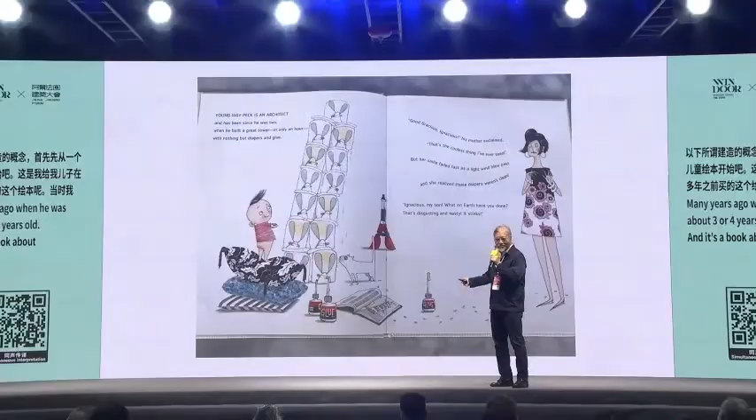I'll start with a children's book. It's a book that I bought for my son many years ago when he was about 3 or 4 years old. And it's a book about Iggy the architect. He was a little baby boy who was really into building things with anything that he could get his hands on. Outside, in the mud, inside, with food.

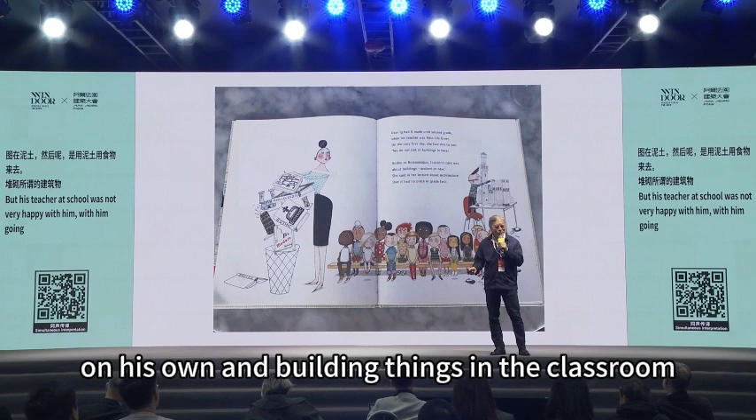But his teacher at school was not very happy with him going off on his own and building things in the classroom, because she had a little bit of a traumatic history when she was up in a high-rise building and she got stuck in an elevator. And this trauma had led her to have this anxiety against architecture, much to the displeasure of this boy named Iggy. He was unhappy about this.

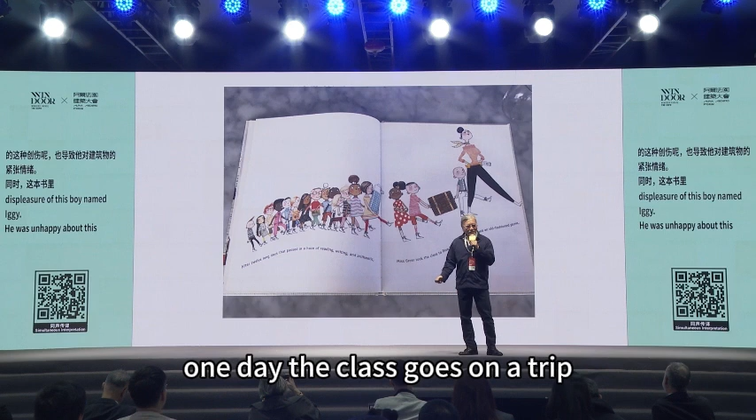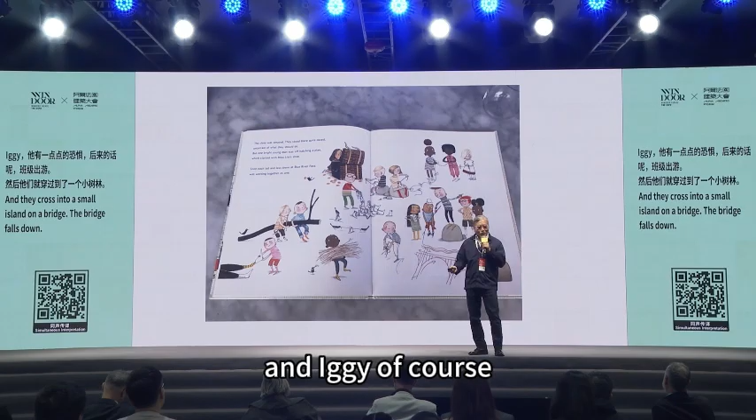One day the class goes on a trip, and they cross onto a small island on a bridge. The bridge falls down. And Iggy, of course, comes to life, strikes up a plan and builds this bridge. And the teacher finds again

the value of architecture. And this story really, by the way, my son is studying architecture at Hong Kong University right now. I had nothing to do with it.

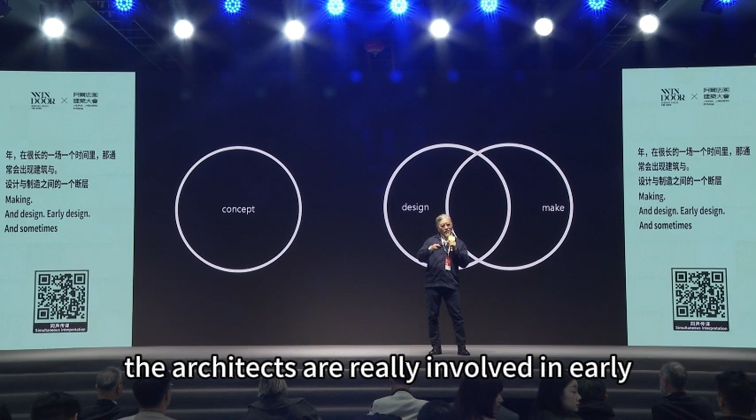Over the years in America especially, there has been for a long time this kind of segregation between construction, making, and early design. Sometimes the architects are really involved in early design, conceiving ideas, and then the construction happens later on with a different group of people. In an ideal scenario, these things become more intertwined, very much in the way that product industries operate, where things are much more vertically oriented, and the whole thing is governed by a single entity.

So this is an idea that really came about because I noticed early in my career that the designing part perhaps was easy, but construction was very difficult. This is where all the challenges come. And so I had developed a lot of respect for people in the industry of doing construction and making. And a little bit less for ourselves, where we thought we need to have a little bit more of a hand in making things clearer to the people that are making and building.

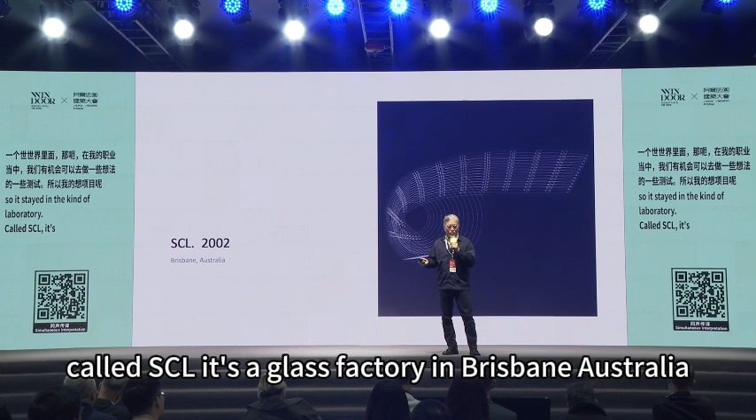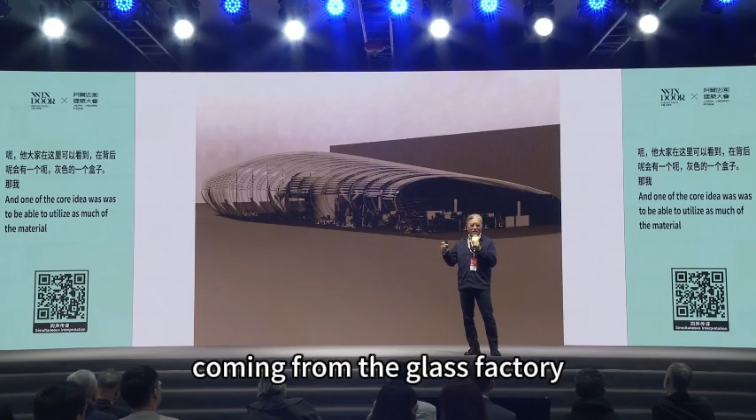Early on in my career, with this idea in my mind, we had an opportunity to test it out. It's a project that never got built, so it stayed in the kind of laboratory called SCL. It's a glass factory in Brisbane, Australia. It's a simple building. They wanted an office in front of their factory, which is the gray box in the back. And one of the core ideas was to utilize as much of the material coming from the glass factory as possible to build this office in front of it.

At the time, we were searching for the right tools to be able to do this. And the idea was: can design information be utilized for manufacturing?

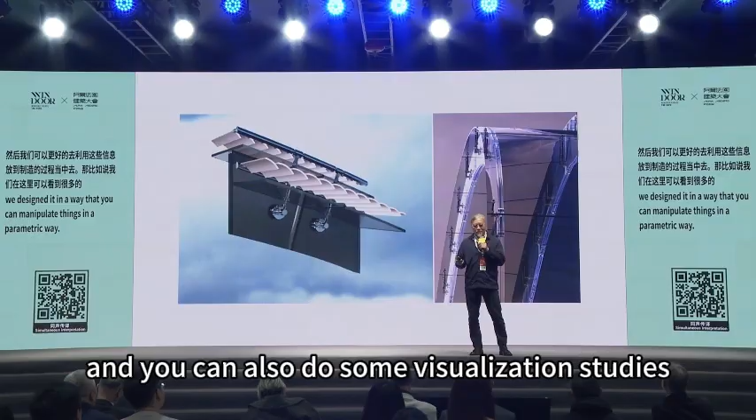So it's a series of glass ribs, and we designed it in a way that you can manipulate things in a parametric way. And you can also do some visualization studies and also integrate engineering. But ultimately, we wanted to find a way to deliver a simple, dumb drawing that the factories could utilize for

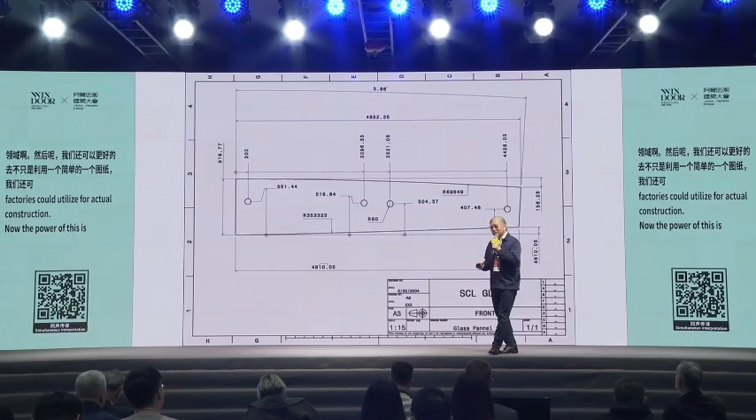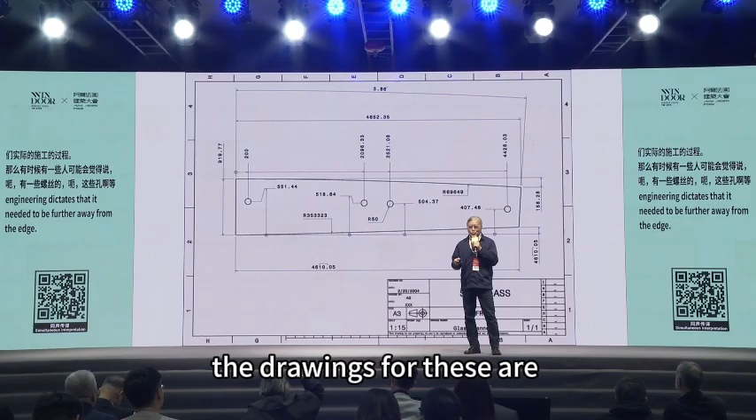actual construction. Now, the power of this is that from the designer standpoint, let's say one of those bolt holes needed to move because the engineering dictates that it needed to be further away from the edge. The drawings for these are thousands and thousands of sheets, and the corrections would take a long time. But if you did it correctly in the model, these things could be done in a matter of minutes and not days.

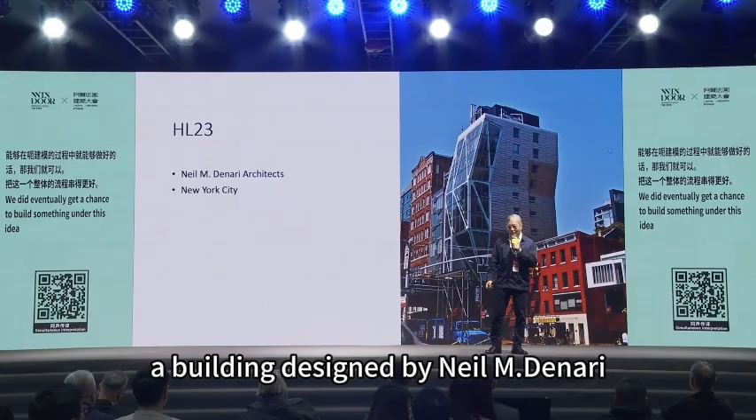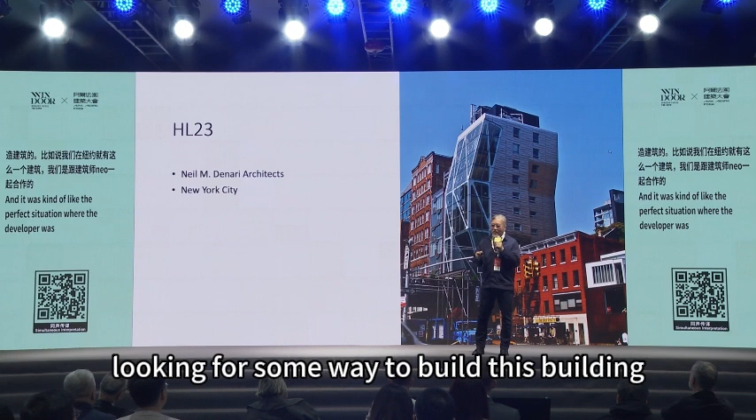We did eventually get a chance to build something under this idea, a building designed by Neil M. Denari, an LA architect, for a project in New York. And it was kind of the perfect situation where the developer was looking for some way to build this building in a different way. And I'm only talking about the facade, not the interior parts. It's a relatively small building, 13 stories tall, and clad with glass and stainless steel.

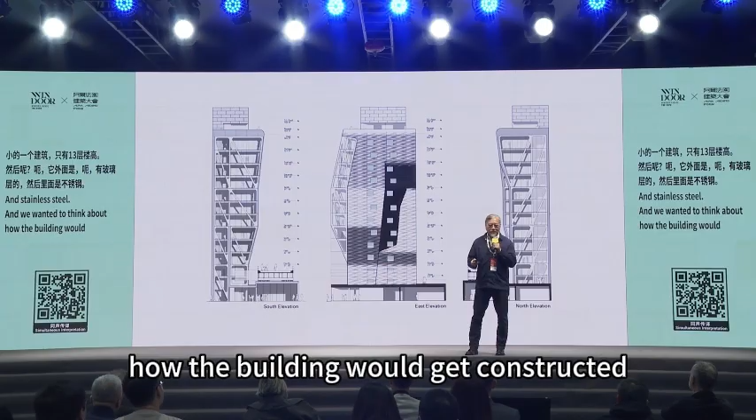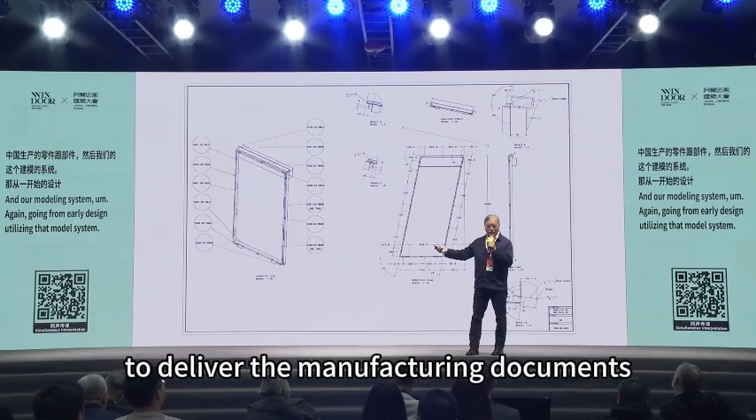And we wanted to think about how the building would get constructed first before we got into the details. Here are some parts and pieces that came from different parts of the world, including China. All of the glazing was manufactured there. And our modeling system, again, going from early design, utilizing that modeling system to deliver the manufacturing documents. And this was the very first panel that was made in a factory in Shenzhen and assembled.

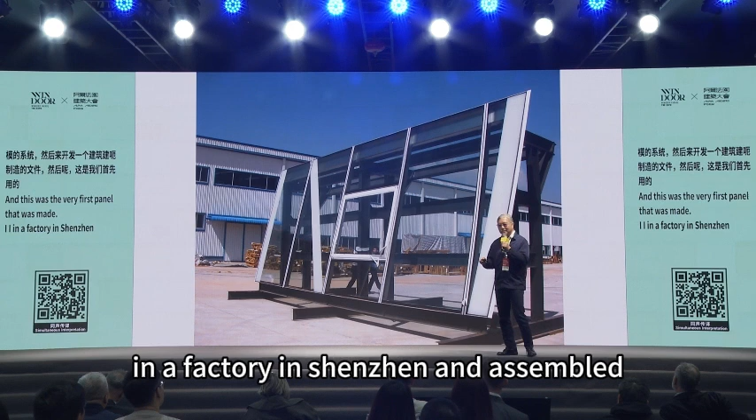And one of the other things that we were really trying to achieve was to get the level of quality as high as possible in construction, and level of accuracy and precision, which we found to be very doable at that time. It was around 2006. The glass manufacturing was already very advanced by that time, but some of the manufacturers based in the United States would reject this project because it just didn't make any economic sense.

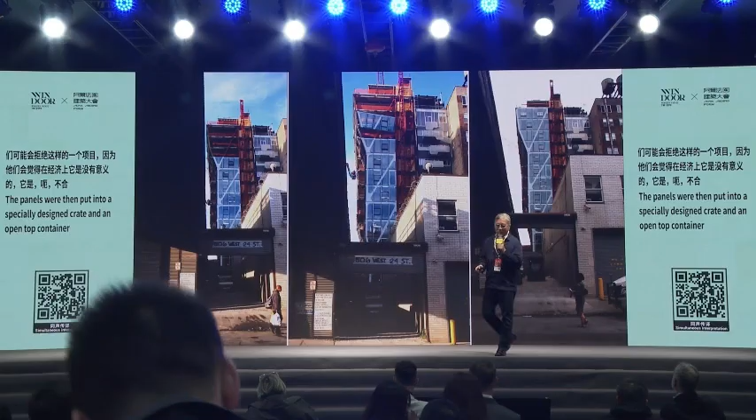The panels were then put into a specially designed crate and an open-top container and built in about a week. All of the facades went up very, very quickly because they were all made in these huge panels, and there was a very limited amount of site work involved.

And in the end, these are some of the panel images of the stainless steel. We had to go down to Argentina to find a company that would make these panels for us. They were making auto body parts. These are dies utilized for making fenders for cars. And it was actually the perfect shop to get these panels made.

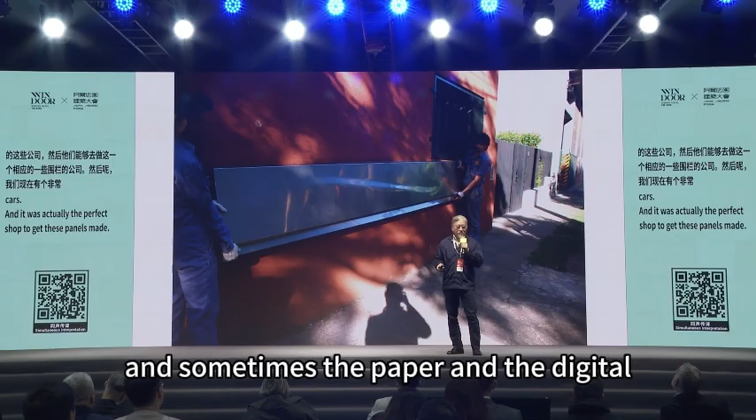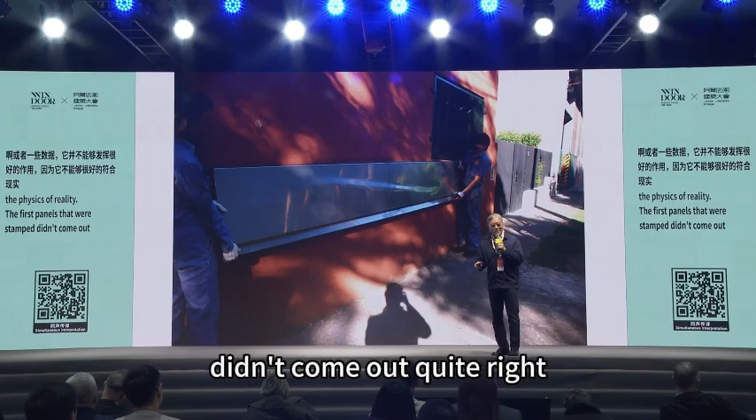And sometimes the paper and the digital doesn't really work because it doesn't suit the physics of reality. The first panels that were stamped didn't come out quite right because we had not accounted for the spring-back nature of stainless steel. The dies were modified and also tried on mild steel. This looks like stainless steel, but this is mild steel. And it gives you this very lovely form.

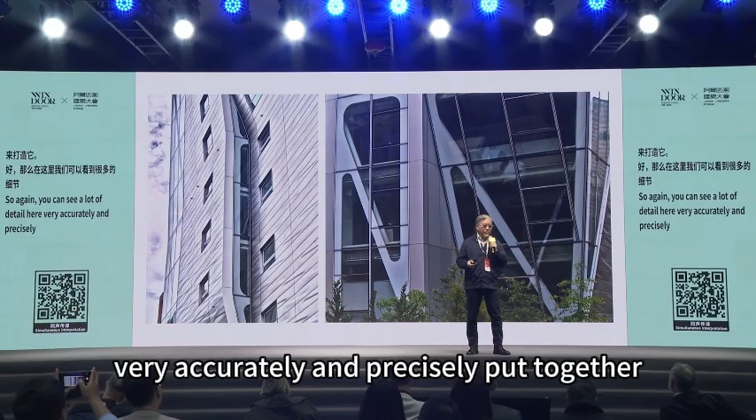In the end, those panels are also pre-insulated, weatherproofed, panelized. In New York City, the construction costs are very, very high. So this was also another way to do this in an economical way. So again, you can see a lot of detail here, very accurately and precisely put together for a project.

And then after that, we had another opportunity to look at our process as a way to do an odd project for Kukje Gallery in Seoul with the architect SO-IL, who are dear friends of mine. The project is a small gallery, and it has this kind of wrapper made out of stainless steel rings. It has a simple concrete box, and it has these appendages, the elevator shaft, the air conditioner, and the stairwell. And then the whole thing is sort of shrink-wrapped with chainmail.

Now, this is a material that we had never worked with before, so we needed to understand its behavior. You hang it one way, and it kind of droops down like this, and then you hang it 90 degrees in rotation, and you get a much nicer, happier chainmail fall. And we knew that that's the way to hang it onto the building.

We also had to understand the kind of geometrical nature and behavior of the material, and we noted the similar behavior between net and this chainmail. The first mock-up, I busted a lot of fingernails trying to make this out of key rings, and then to try to, again, understand its behavior.

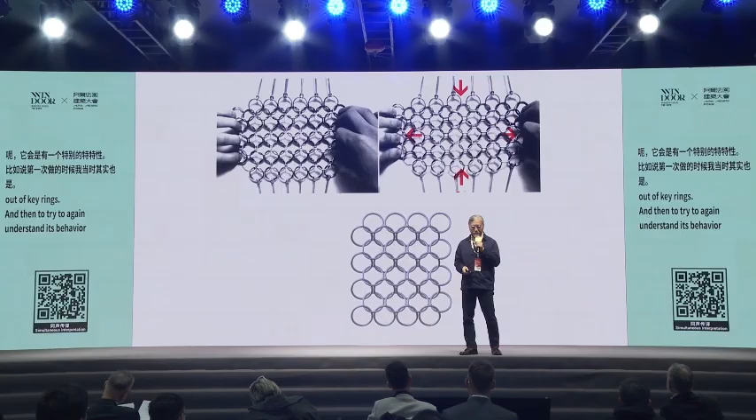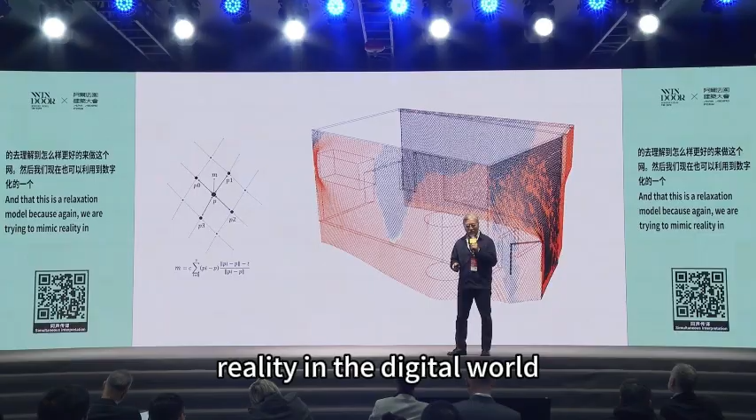And then it all gets digitized. And this is a relaxation model, because again, we are trying to mimic reality in the digital world. And what happens here is that once it gets mimicked with its controlling points and its behavior, then it can be analyzed and set to see what the state of this material is and what shape it forms when the chainmail is hanging on the building in its natural state.

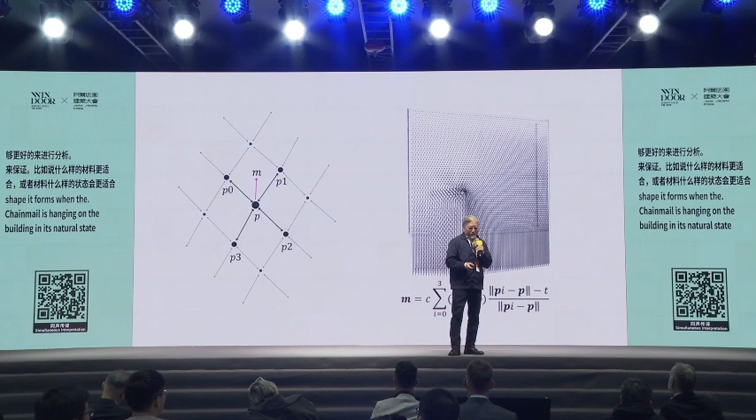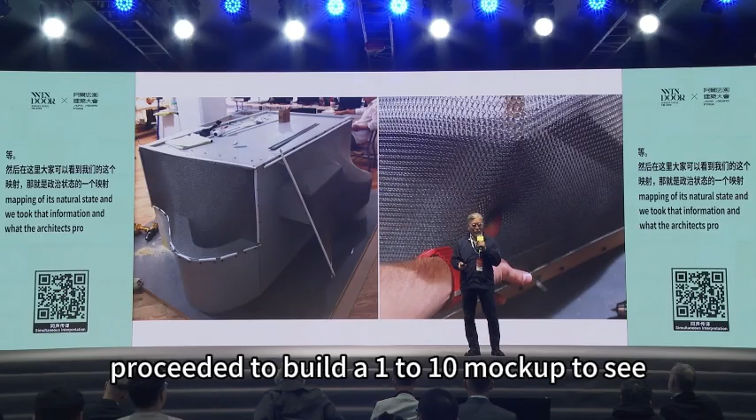And then this is the mapping of its natural state. And we took that information and with the architects proceeded to build a 1 to 10 mock-up to see if the model was true. And in fact, it worked out in a way that we proceeded to make the first chainmail mock-up itself.

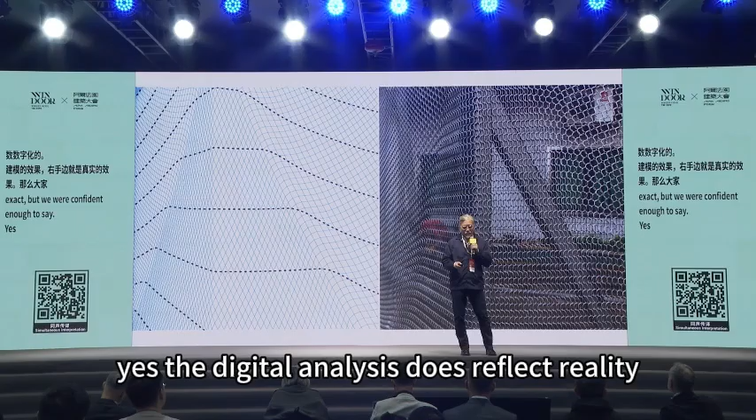Those are not rips, these are just the seams which would be welded together with the rings. And then you have the digital on the left and the reality on the right. And it's not one-to-one exact, but we were confident enough to say, yes, the digital analysis does reflect reality.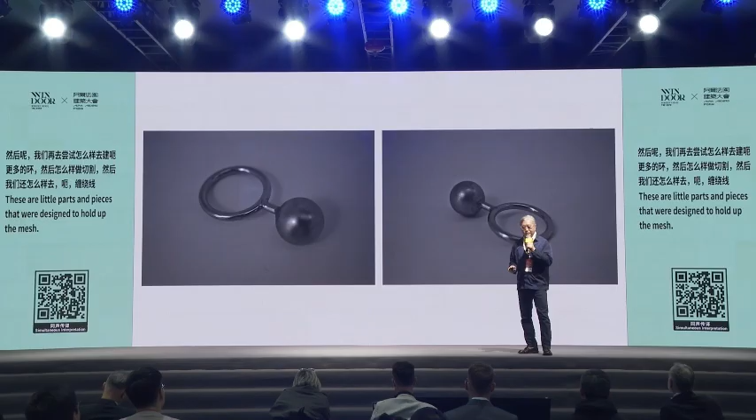This is the first ring tested for load, and then trying to figure out how the rings would be made, which would be a series of coiled wire that would be cut. These are little parts and pieces that were designed to hold up the mesh. And then these are the terminations of the parts where they go into a channel to support the ring.

And here you can see the first mock-up of the contraption at the top of the building where the mesh is hanging from, and on site. Now you can see that it's a little bit more complicated than it may need to be, but what we have here is that we wanted to prevent any concentration of load at the top edge where you would have the most amount of dead load and most amount of wind load.

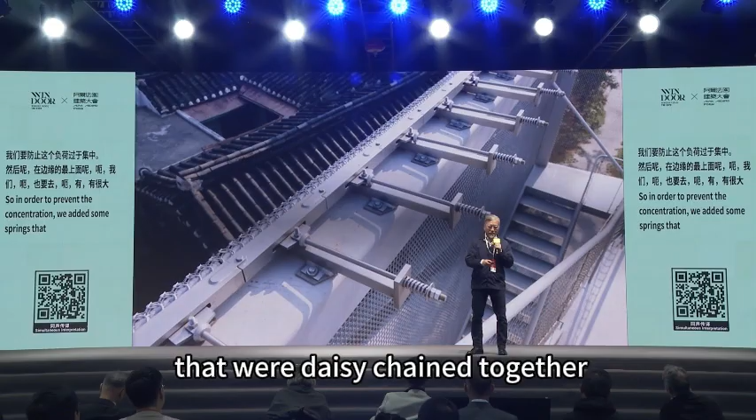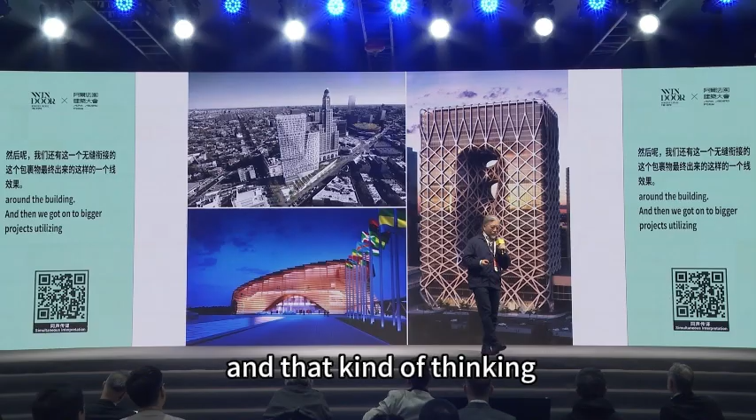So in order to prevent the concentration, we added some springs that were daisy chained together at the face. So if you had any concentration, those would dissipate and be shared by the other connections. So then what you end up with is this kind of seamless wrapper around the building. And then we got onto bigger projects utilizing that methodology and that kind of thinking, in various different locations around the world.

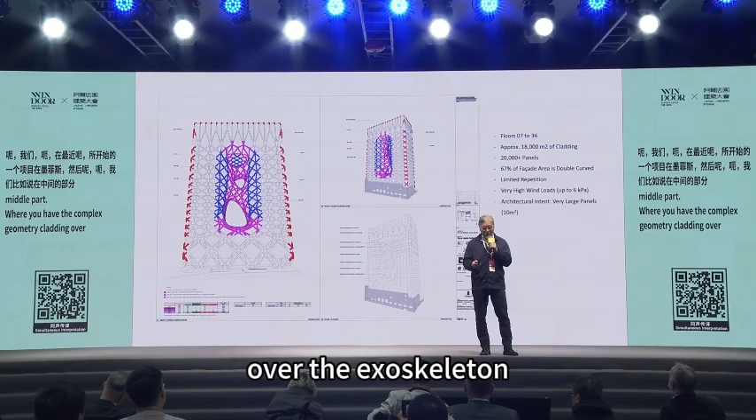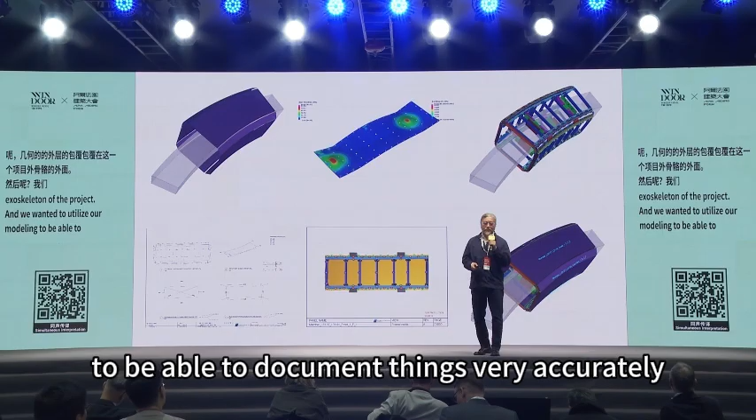Morpheus is a project where we came on quite late, and the problem area was this middle part where you have the complex geometry cladding over the exoskeleton of the project. And we wanted to utilize our modeling to be able to document things very accurately, but in a very workable way in the field. We had to gather some information.

We wanted to make sure that we have the architectural model, and then the structural model, which is on the right, and then the orientation model, which is shown in the blue here. And that gave us the ability to understand what we needed to do between the structure and the cladding. As you can see, there's a lot of variation and empty space on the outer zones between the cladding and the structure.

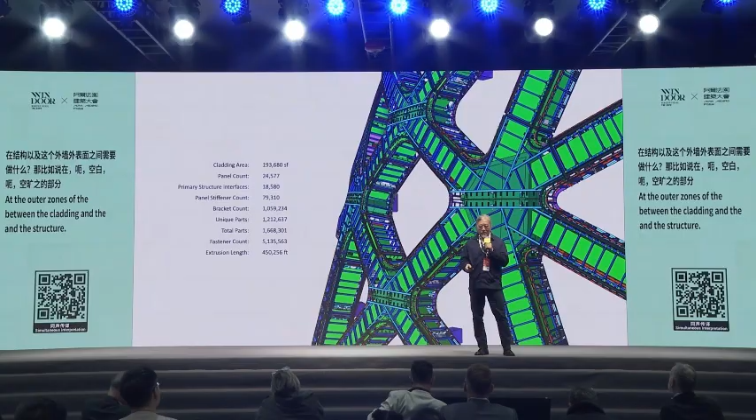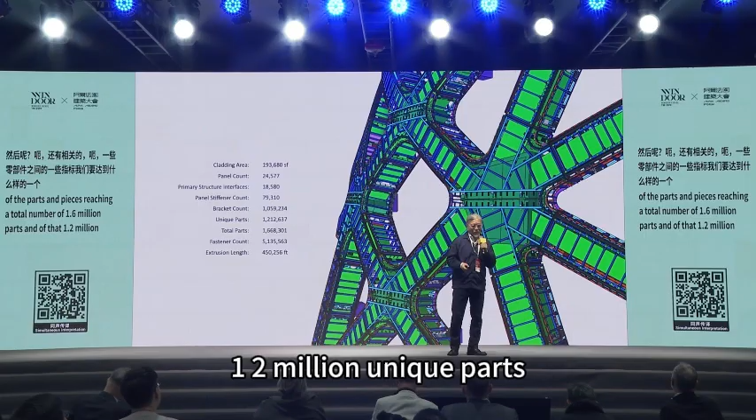And some metrics about all of the parts and pieces, reaching a total number of 1.6 million parts, and of that, 1.2 million unique parts. So in some ways, there's no other way to do this rationally without going through a full, deep modeling process that was automated.

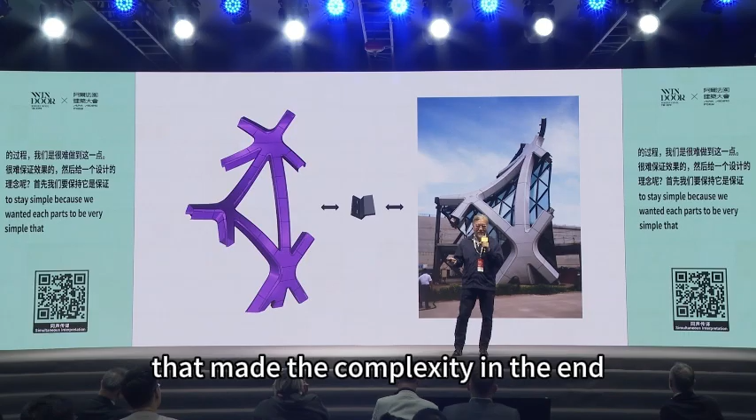But the design concept had to stay simple because we wanted each part to be very simple, that made the complexity in the end. So here you can see all those simple parts and pieces that were designed for this project. Any factory could make this. And then the assembled pieces, so that the factory could look at all of these parts and pieces that were assembled to visually check that they were in the right places.

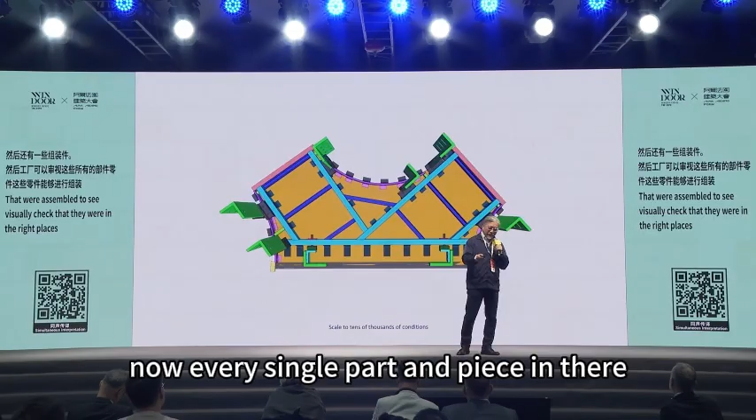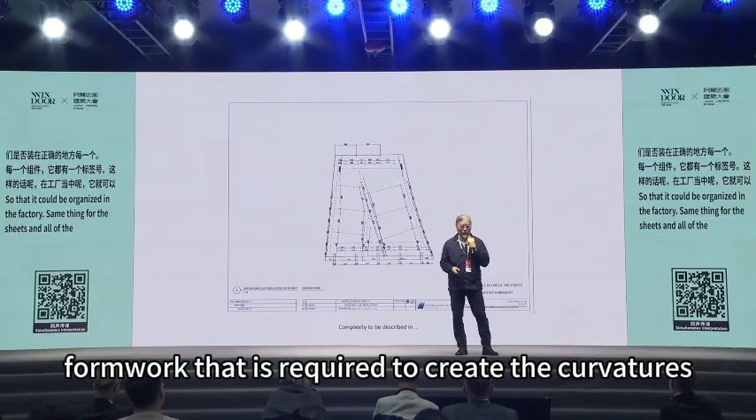Now, every single part and piece in there is tagged with a unique tag number so that it could be organized in the factory. Same thing for the sheets and all of the formwork that is required to create the curvatures.

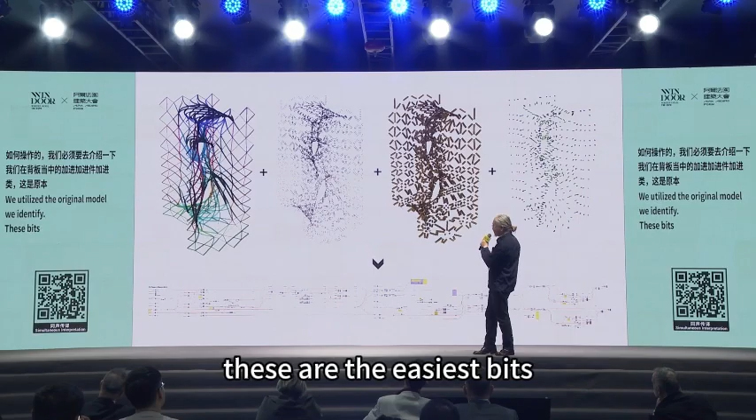I'll skip through this. This gets into a little bit too much detail, but it just basically shows, for example, how the process actually works. So we need to introduce some stiffeners, for example, in the back of the panel. We utilize the original model. We identify these bits first. These are the easiest bits, which are more or less kind of simply curved or straight.

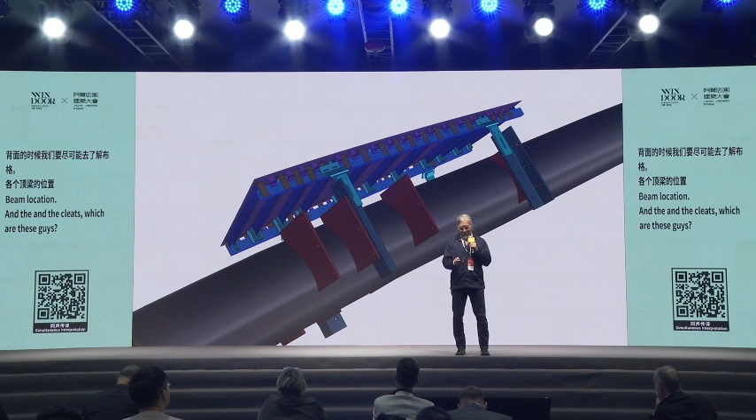And then we identify where the brackets would be to hold up all of this and create the surfaces where the stiffeners would go. And once we try it out on a single panel and we know that it's going to work, its relationship to all of the beam locations and the cleats, which are these guys, would then be all coordinated. And the magic here is really that all of that then gets automatically generated, and it's not somebody sitting there trying to model up all these pieces individually.

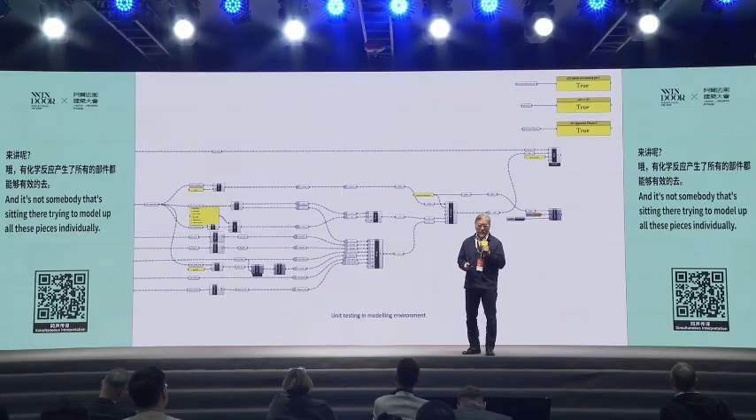We also need to do a check to see if it's correct. So all these self-addressed parts and pieces, we break it apart into individual parts and pieces and then bring them all back together to see that they do fall into the right location.

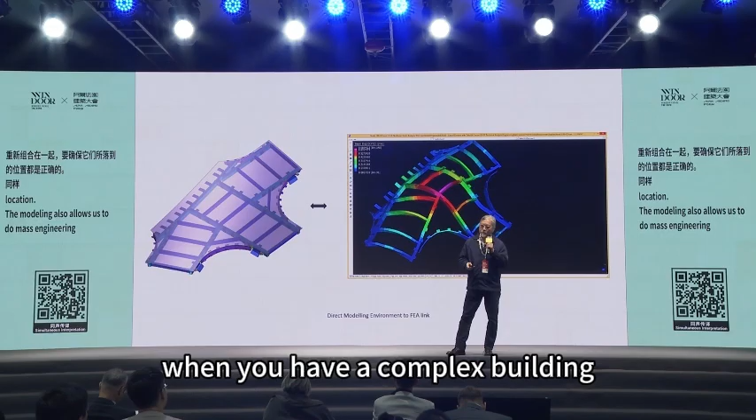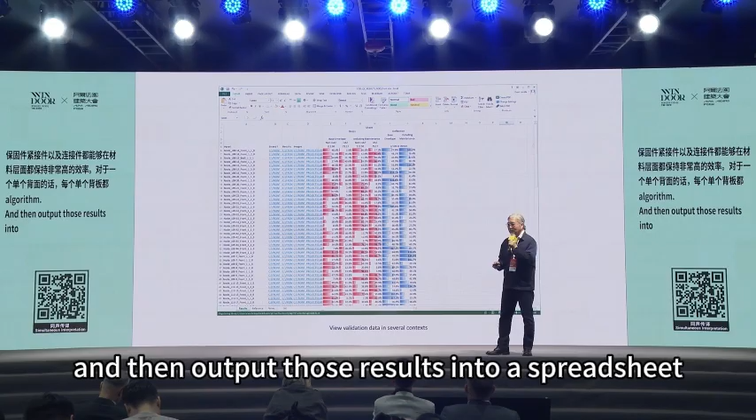The modeling also allows us to do mass engineering. When you have a complex building, often you might choose 1, 2, or 3 locations, which are the worst case, and design everything based on the worst case engineering. But in this case, we want to check everything and then create some sort of families of brackets that are going to give us a little bit more efficiency in the material use. So every single panel, every single condition then gets modeled through an algorithm and then outputs those results into a spreadsheet. And again, all of this is done in an automated manner.

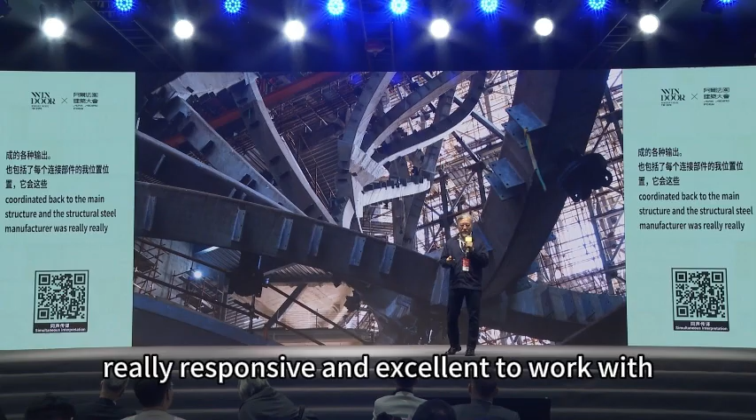Output including the locations of each cleat, which is coordinated back to the main structure. And the structural steel manufacturer was really, really responsive and excellent to work with in receiving our digital information to be put onto their steel. And as you can see, they were located in a very precise and accurate way.

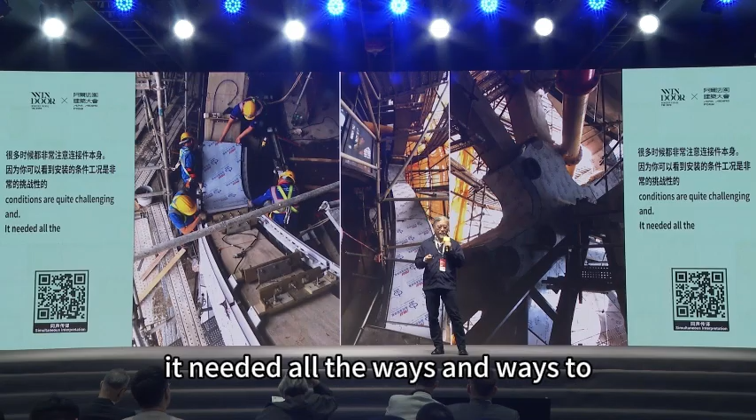A lot of attention was paid to the brackets because, as you can see, the installation conditions are quite challenging. And it needed all the ways to install the panel in an accurate way, because if the brackets didn't allow you that flexibility, then the joints would be off.

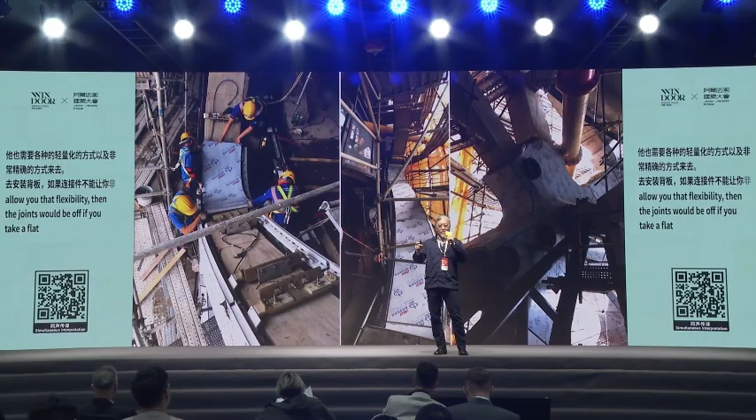Now, if you take a flat panel and you try to align the panels, it's relatively easy, in and out, up and down, and you should be okay. But on a double curve panel, that adjustability is really, really key to getting the joints to line up. And as you can see, there's a tolerance of about 1 to 2 millimeters in the worst case scenario to create an alignment between the panels.

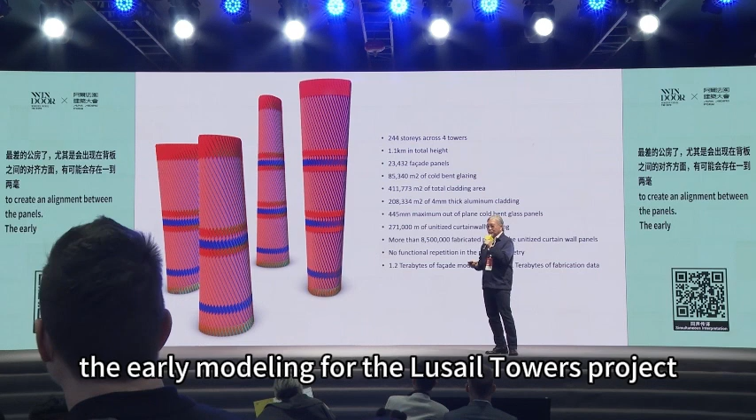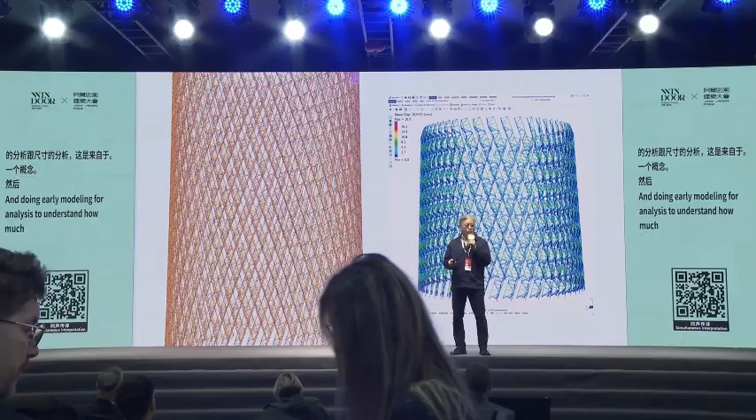The early modeling for the Lusail Towers project was very helpful in defining and knowing what the project is in terms of its size, scale, and quantities. And this is taking from the concept and doing early modeling for analysis to understand how much tonnage of steel or aluminum you have, and other kinds of analysis to see how much we can reduce heat curved panels versus cold bent panels, so that in the end we're left with very few heat curved panels and the majority of the panels going into cold bent.

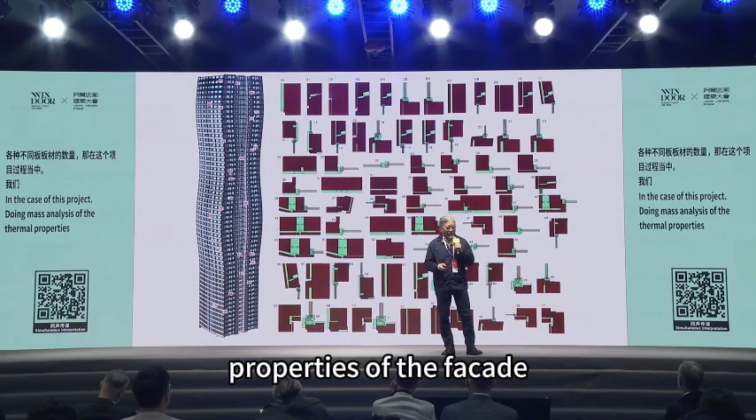In the case of this project, doing mass analysis of the thermal properties of the facade in order to get to net zero passive house design accreditation. And this kind of early modeling and early knowing and unveiling what is sort of hidden in the project, I think, is a key idea for us.

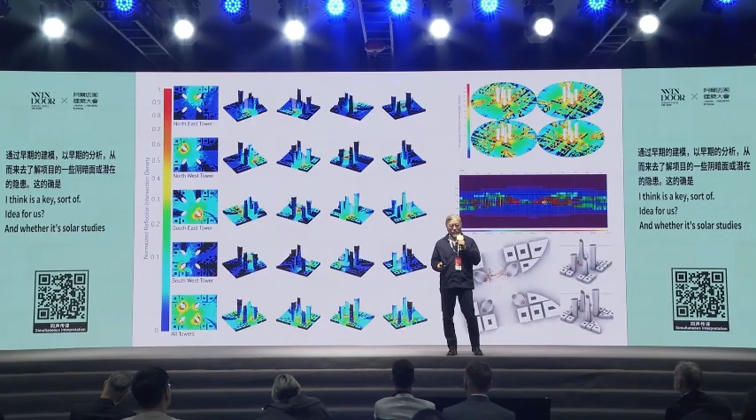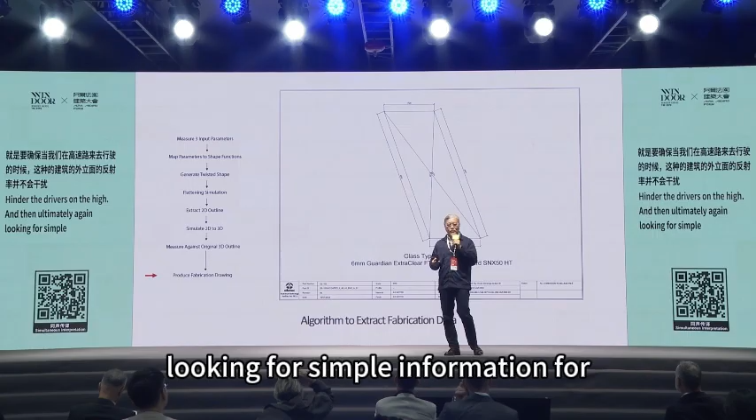And whether it's solar studies like this, a key issue that we wanted to ensure was that when you're driving down this highway, the reflectivity from the building wasn't going to hinder the drivers on the highway. And then ultimately, again, looking for simple information for parts to be made for the facade.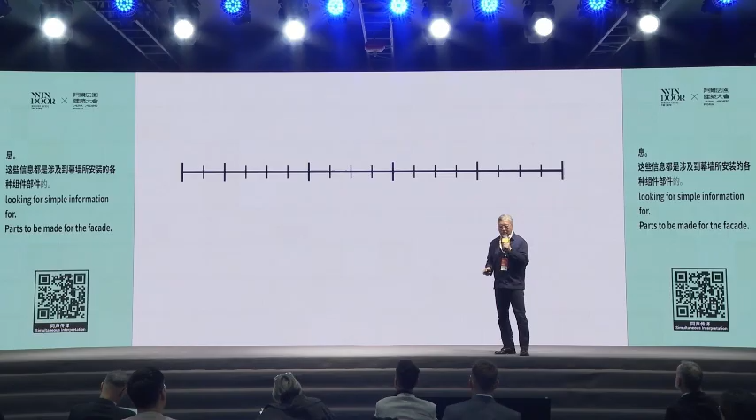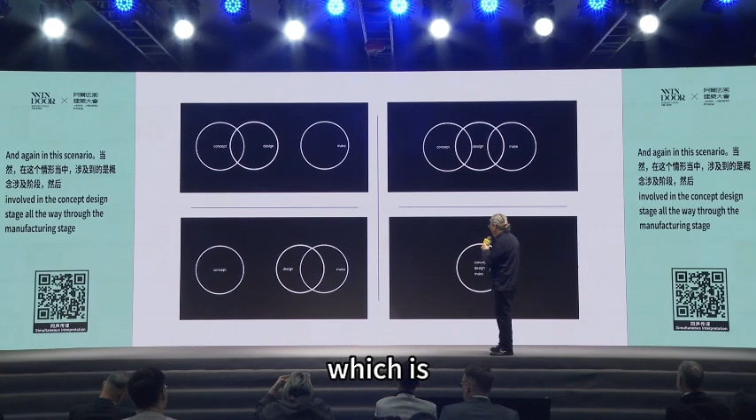Now, the project really started in 2018, and we needed it to be completed by winter of '22, which is the World Cup in Doha. So the process was really geared towards accomplishing that timeline. And again, in this scenario, we're involved in the concept design stage all the way through the manufacturing stage, which is this idea here.

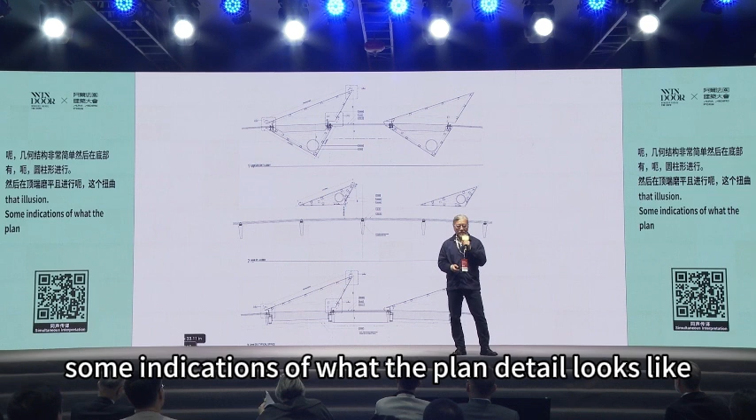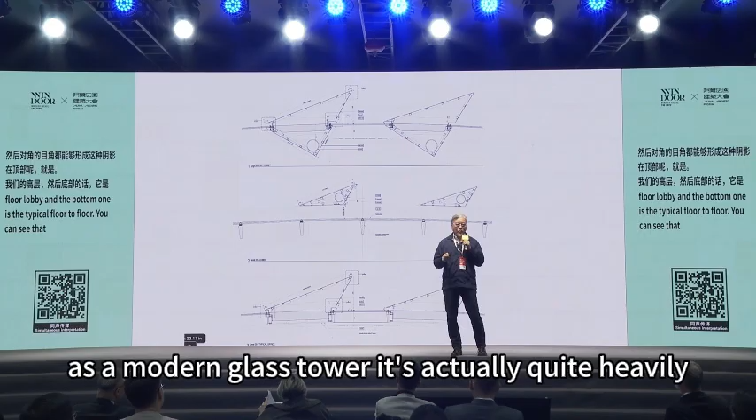The building is overall geometry-wise quite simple. You have a cylinder that's been squashed at the bottom, rotated at the top, and squashed again. It looks like it's a little bit twisting, but it's actually the diagonal facade that's creating that illusion. Some indications of what the plan detail looks like. The top one is the long span, one is at the ground floor lobby, and the bottom one is the typical floor-to-floor. You can see that as a modern glass tower, it's actually quite heavily insulated and shaded.

I'm getting kind of an indication that we should come to a close soon, but I'll go a little bit faster.

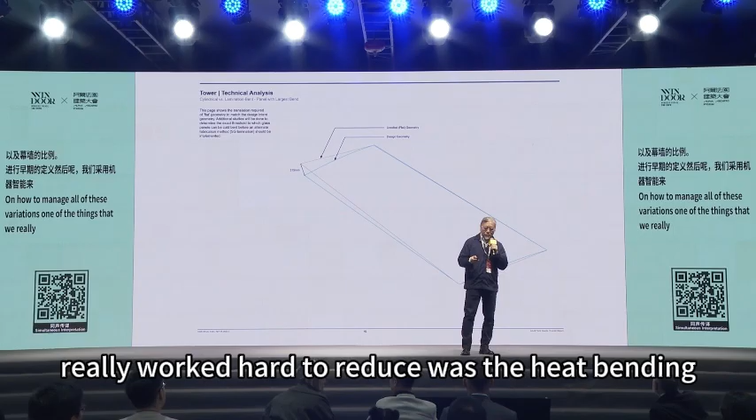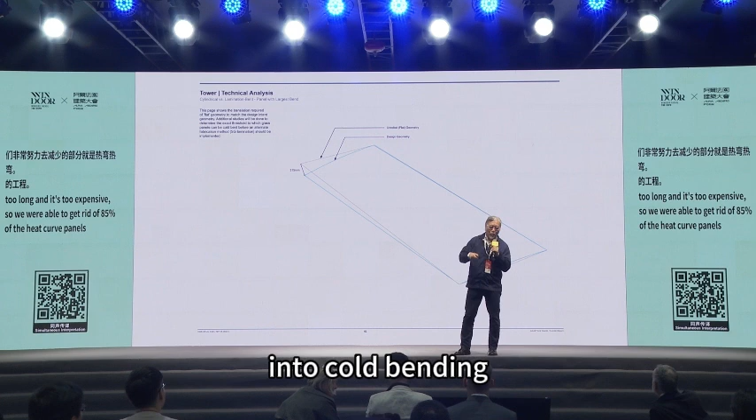These are some earlier studies, again, to understand the window-to-wall ratio. These things must be defined much earlier. And then going into machine intelligence on how to manage all of these variations. One of the things that we really worked hard to reduce was the heat bending, because it takes too long and it's too expensive. So we were able to get rid of 85% of the heat curved panels into cold bending. And in order to do that, we had to check to make sure that we could do that without compromising the seals and the IGU or the stresses in the glass. So of course you have to check the glass, the interlayer, the stresses in the interlayer, and the stresses at the spacer to do that.

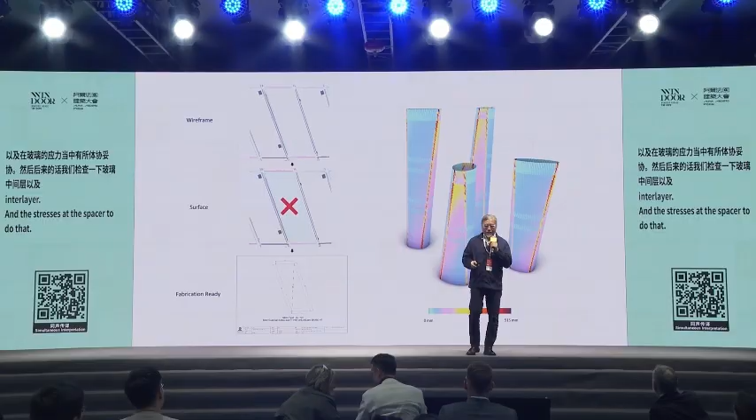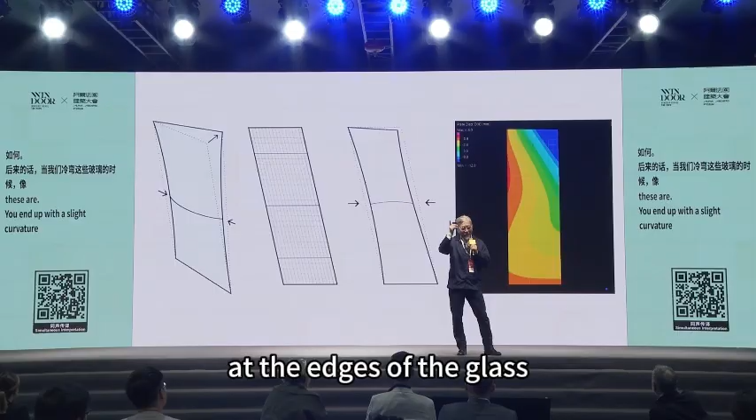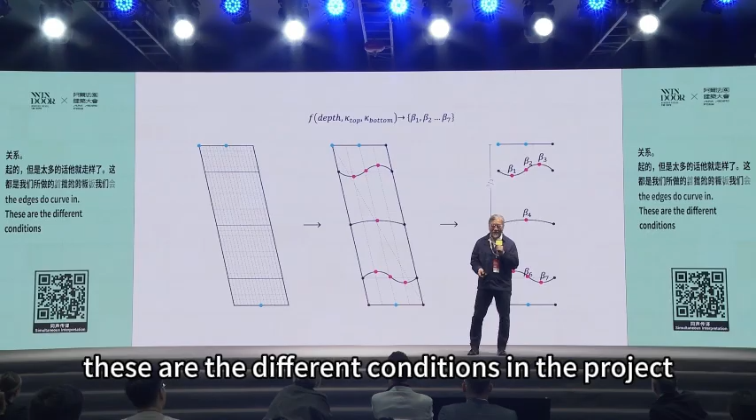Ultimately, we started to analyze the panel itself and noticed that there was kind of a flattening here. And we wondered where that material was coming from. And it turns out that when you cold bend glass as large as these are, you end up with a slight curvature at the edges of the glass. Now, a little bit is okay, but if you get too much, it might fall out of the pocket. And indeed, in the first panels that were made, we can see that the edges do curve in. These are the different conditions in the project. And so we came up with an equation to study this and put it into our algorithm that plots it out into a bounding box. And then check it again.

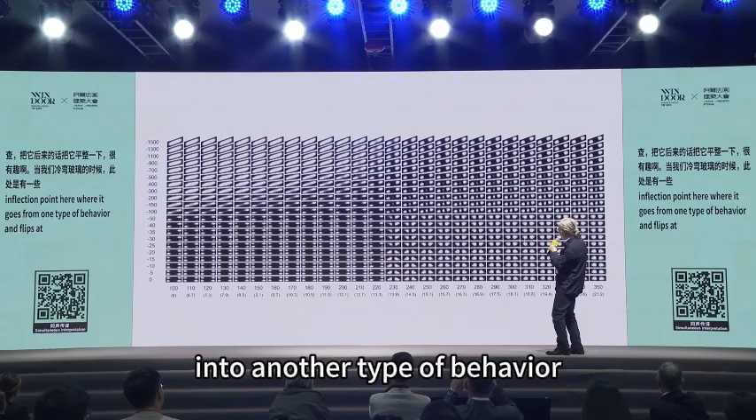Unroll it. This is kind of an interesting point where you cold bend the glass, and there's an inflection point here where it goes from one type of behavior and flips at this moment into another type of behavior. Physical samples were then scanned to see if our analysis is correct, and indeed it's giving us very similar characteristics.

I'll skip through this because we're running out of time.

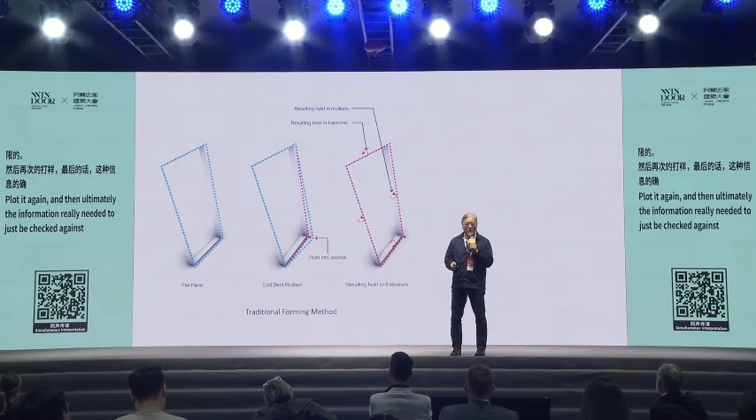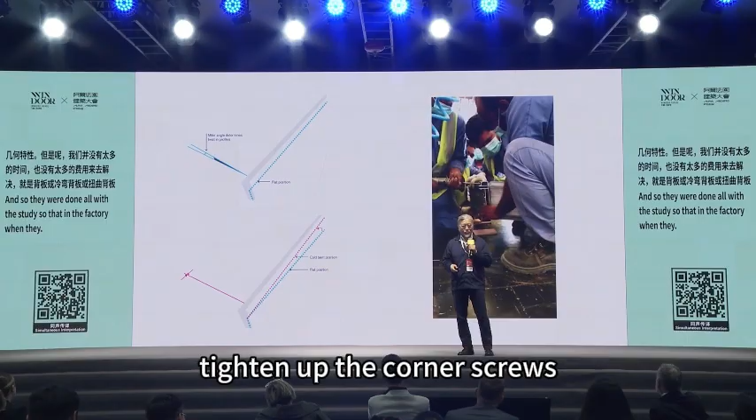Plot it again, and then ultimately the information really needed to just be checked against reality and then flattened for fabrication. The mullions also are kind of cold bent because, again, time constraints and costs. So we needed a way to make sure that these things are all compatible with the geometry of the building, but that we didn't have to go through the expense and the time to actually curve these panels or bend them or twist them. And so they were all done with the study so that in the factory, when they tighten up the corner screws, they all fall into the geometry that they need to be in. And so you can see the amount of cold bent pieces of glass in this project.

And then that idea needs to get spread out into mass fabrication automated systems so that it all can go into the factories either as a drawing or as CNC code. This is for a different project, but the process is exactly the same. And then assembly drawings.